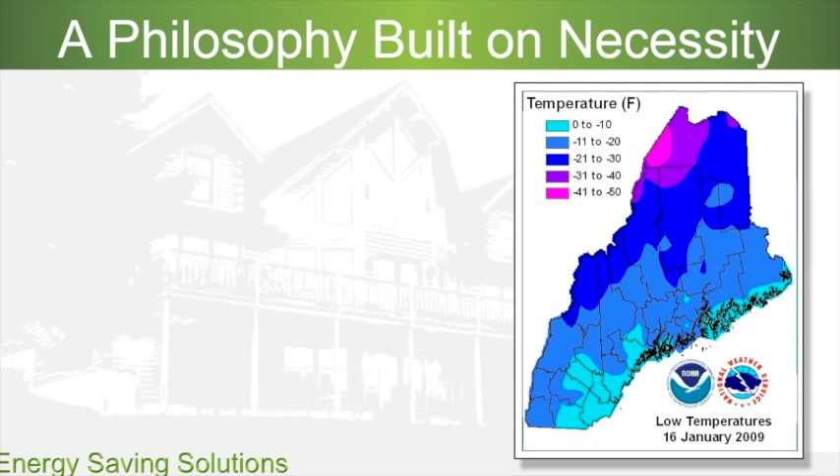And energy is something I've had an awful lot of passion for in the last few years, and I think it's a philosophy built on necessity, because we come from a very, very cold part of Maine, the northern part of Maine, and I think most people don't realize how cold it actually is up there. And on the slide you see in front of you now, on January 16th, 2009, one of the secretaries in the office actually took a picture of her thermometer on that day, which was just exactly 50 below zero. So you can see something we always strive to do in northern Maine is to stay warm. So I think part of the reason that I enjoy the energy part so much is that everybody wants to stay warm, and that's not really an exaggeration.

But for you folks, why is energy efficiency important? Obviously not for some of the same reasons as me, but controlling your cost. That's always the big deal when it comes to anything with your home, is what does it cost? And it's so easy to make your home very energy efficient today versus probably in past times. There is absolutely no reason not to do it, and that'll keep your costs down for the future. Now, something else that will definitely be important to some of you, as it is with me, is comfort. No one wants to sit near their windows or their doors or a light switch or a receptacle and feel a draft all the time. So comfort is also very, very important.

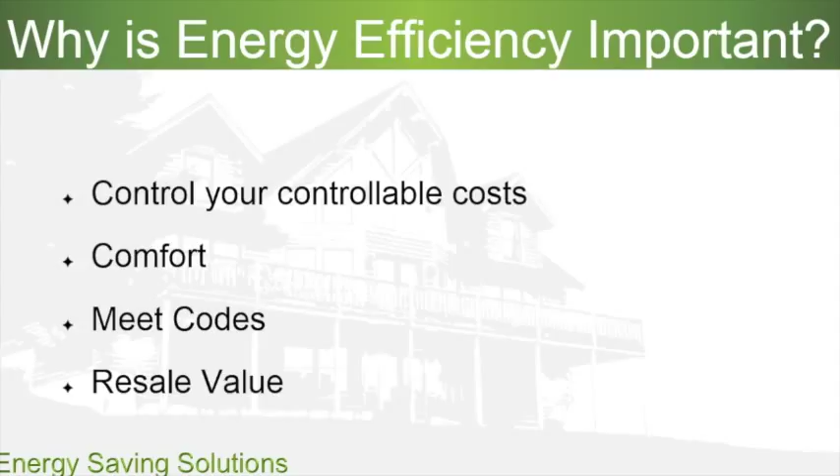A couple of things that you may not really think about that much. It's also important to meet codes, and we'll talk about that in depth as we go on. Meeting the codes will be different for different areas, but it's very important that you do, otherwise you will not be able to get that occupancy permit. Something else that maybe has not crossed your mind is the resale value of your home. Banks are getting smarter and smarter now, and they used to ask for just a copy of your taxes and your insurance costs. But today they're also asking to see the cost of your energy bills when you go to resell your home or even for a second mortgage. So resale value is also very, very important.

Now, what are some of the things that we can do to make sure that our home is energy efficient? And the very first one really doesn't have anything to do with your home at all, but it's got everything to do with where you're going to build. Now, if you've already picked out your land, then this will not apply to you. But for those of you that have not, I would strongly recommend that you take a map of the area where you're going to be working, going to school, shopping, all of your daily activities, and plot them on a map. And along with that, draw in the area where you'd like to purchase the land. And obviously, this will probably be a fairly large area. And you can start with the nearest area that you do all of your daily activities and work outward. That way, that will help control your commuting and your transportation costs and not break your family energy budget.

Now, the solutions to making your home very energy efficient are many and varied, and most of them are very, very simple. These first few slides I call the Working with Mother Nature series, because what they have to do with is taking advantage of what Mother Nature offers us. And she offers us so many ways to help us save energy. If we just pay attention to her, she can do a great job, really and truly. That may sound a little far-fetched, but it's really very simple. And the first thing we can do is take one long side of our home, as you can see in the slide here, and point it true south.

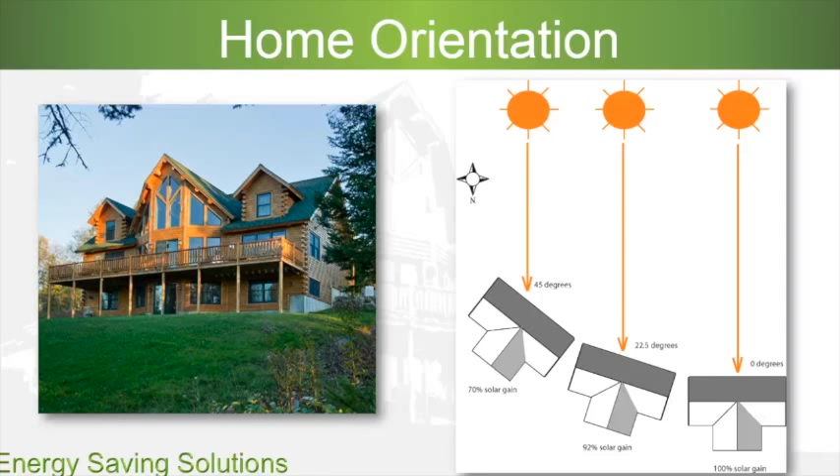And also, if you ever think that you're going to put solar collectors on your roof, and I hope many of you are considering that, because as technology grows and changes with solar energy, it's becoming so inexpensive to do it, it's almost a no-brainer not to. But if you are going to consider putting solar panels on your roof, any type of solar panels, whether they be electrical producing photovoltaics or hot water like on my own home, then you want them pointed true south to get the maximum benefit.

And if you are going to consider putting them on, I hope you tell us, because we've got something called a solar ready design that if you tell us which one of your roofs points south, we can design a chase or a pathway, if you will, that takes those pipes or wires directly from the roof, through the roof, and into your utility room or your basement or wherever it's appropriate in your house for them to go.

In my own home, of course, I put my solar collectors on back in the 80s, and I've got these ugly pipes that run horizontally across the roof and then down the walls and into the basement. They're ugly, they're inefficient, and they require more maintenance. So we don't want to do that. So we're happy to design that for you, and that solar ready option is absolutely no charge.

Something else that we need to consider on our home, again, very simple, very easy, and still working with Mother Nature, is the roof overhang. Because what she does to help us is in the summertime, the sun is very high in the sky. And in the wintertime, it is much lower in the sky. So with just a normal 2-foot overhang, which is the standard overhang on our homes, it will block out almost all of the summer sun.

We're letting in almost all of the winter sun, which is exactly what we need to do. We don't want that overheating, obviously, in the summer. And you can see by the slide on the right-hand side what the difference is in the height of the sun from July to December. And it is very dramatic and easy to take advantage of.

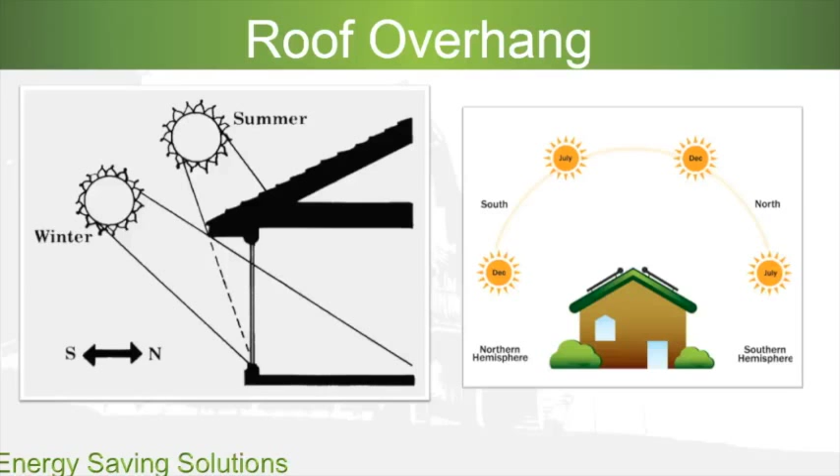Something else that is easy to do and hope you consider is natural lighting. If you think about what rooms you're going to be in your home when you're awake in the daylight hours, generally those rooms are your kitchen and your living room. So if that's where the natural light is during the day, why not put those on the south side of your home? Again, with a little bit of design, it's pretty easy to do. It doesn't cost any more to put them there than on the north or the west side or anyplace else. And you will get all that daytime light.

Now, almost all of us have walked into someone's home, and even in the kitchen or the living room during the day, the first thing they had to do when they walked in was turn the light on because it's so dark. There's just really no need of doing that, and it's going to expend a lot of electrical energy to turn those lights on all day long. So let's put them on the south side. And also, you'll find it's a natural pick-me-up to have all that natural light in your home all the time when you're there, because it's psychological.

It feels much better when you walk into a nice bright room versus a dark room. And for myself and my wife, we like to have that sun beaming in the morning, so we put our bedroom on the east side. So as soon as the sun pops up, it comes in our bedroom, and that's a nice way to wake up in the morning having the sun come in there. So a couple really easy things you can do with just natural lighting just by designing your home the proper way.

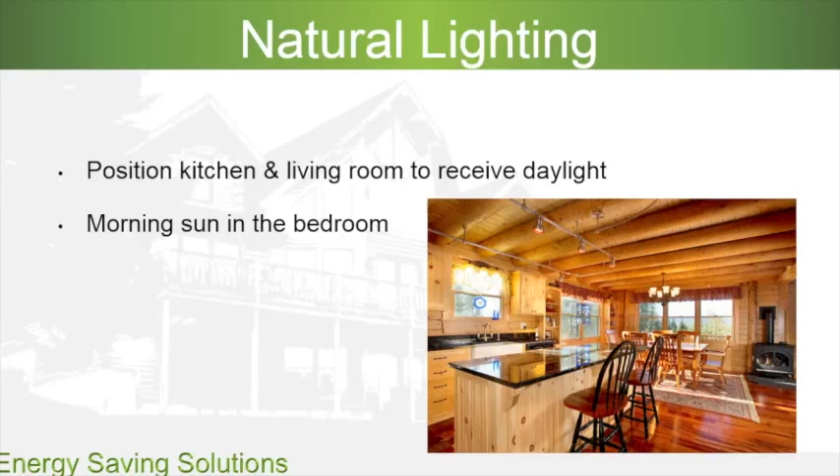Something else that's easy to do, but may take a little teeny bit of thought, are shade trees and windbreaks. Now we talked about the south side sun and how Mother Nature helps us with the angle by blocking it in the summertime and letting it in the wintertime. That's not the same way on the east side of our home and the west side of our home. Obviously the sun is rising in the east and setting in the west, and if we're not careful, we can get some nasty overheating in the summertime by not blocking those sun rays out.

So one of the easy solutions, again, that Mother Nature gives us, are some shade trees. In fact, I'd go a couple steps further and say I'd recommend deciduous trees, leaf-bearing trees, that are dwarf or semi-dwarf fruit trees. And the reason that I say that is, of course, with the deciduous trees, when it gets warm in the spring, the trees leave out. Cool in the fall, and you want to let that sun back in, the leaves fall off.

And the reason I like to have deciduous, dwarf or semi-dwarf fruit trees is because with the fruit trees, you can always shear them. You're always pruning your fruit trees to the proper size anyway. So if you want to let a little bit more sun in, prune a little bit more off. If you want to let a little bit less sun in, then let them grow for a couple of years. But you don't want to put elm trees or birches or maples, any big trees out there in the east and west side, because otherwise, eventually the trunk of the tree or the stem of the tree will block out most of your sun.

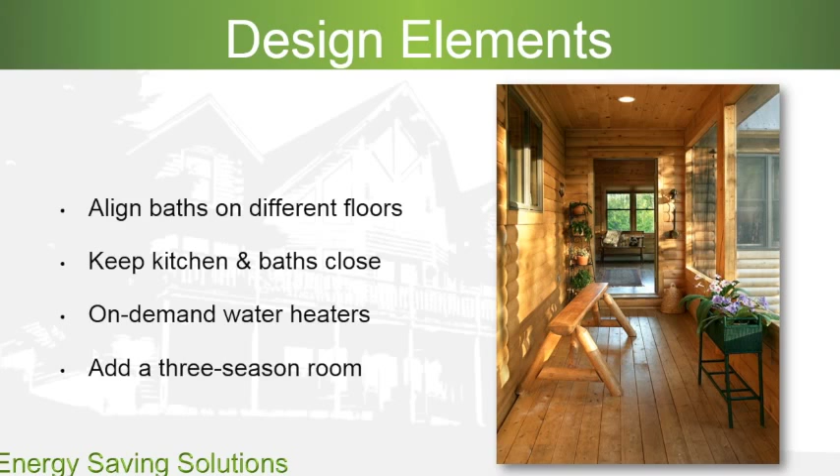So the wind would beat against that wall, but it wasn't an exterior wall to the main home. So it cut our heating bill by probably about 7% with wood consumption. So a couple of design ideas there that maybe hadn't crossed your mind, but really do make a significant difference.

But it only had 2 wires on it to hook it up. I just pulled out the old thermostat and plugged it in, and said, okay, I can do that. Well, immediately I found, and you can read up on these smart thermostats, especially this Nest one, that they are very simple to run. You don't have to really do anything if you don't want to.

But when you start turning it up during the day and turning it down during the night, and especially on the weekends if you're gone, it starts to remember when to turn itself up and when to turn itself down. So if you forget about it or if you're away, you can either turn it down with your computer or it remembers to turn itself down at night. So it works really, really well. Very simple, not real expensive, works real well.

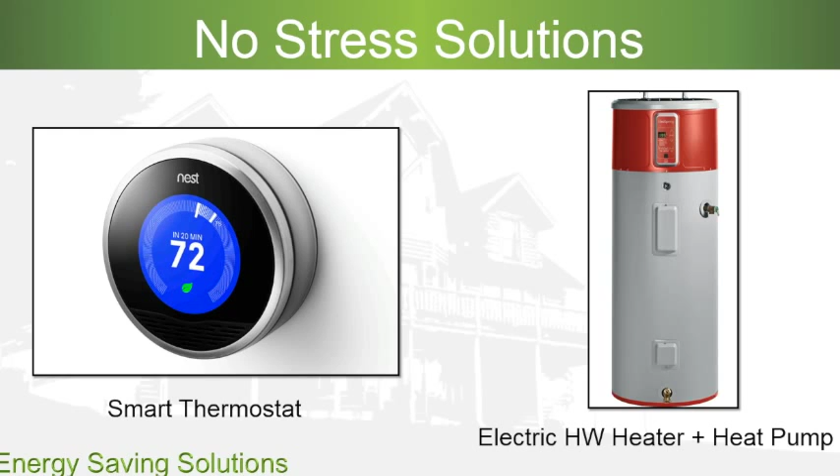Something else that we have to talk about when it comes to energy efficiency is windows and doors. Some of us think that glass is a good insulator. Glass is a very poor insulator. In fact, it's a great conductor.

So when we're designing our home, placing windows in it, we need to be conscious and be aware of where we're going to place our glass. Now, we've talked about that quite a bit in the past already, but on the north side, depending on your latitude, and if you're more into heating than you are cooling, you probably want to minimize the amount of glass on the north side and maximize it on the south side, like we've talked about. So obviously to gain the solar gain but not lose it at night.

And how do you know if you're getting energy efficient windows and doors or not? The very easy thing to do now is look for the Energy Star seal. Up until two or three years ago, it wasn't very restrictive to get a seal, so most companies got it. But the last 2 or 3 years, they've really tightened their requirements to get an Energy Star seal on windows and doors. And now they're probably in the top third of the country. The top third best windows and doors have the Energy Star seal, and it really does mean something, and it makes a difference.

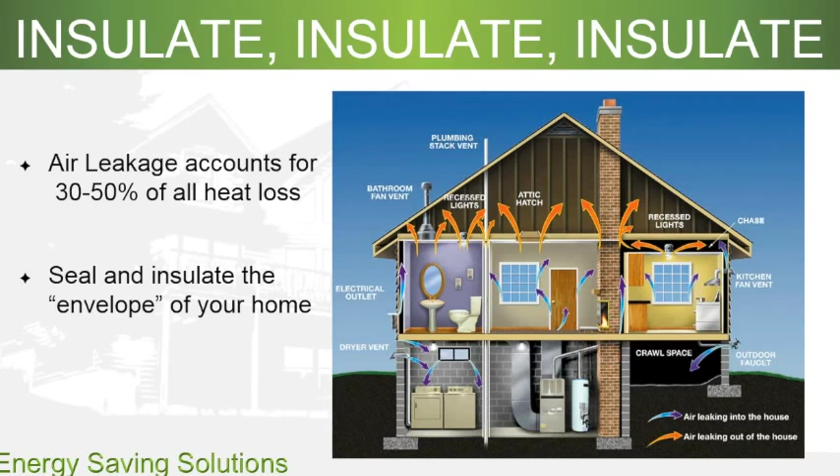Now, the number one way to prevent air leakage in your log home is buy dry logs. It's difficult to overemphasize that, because if the logs are dry and they move very little, then there's very little opportunity for air to get in there. But if the logs are not dry, then between every log, as it moves, there's potential for those logs to have air infiltration between them.

And I've heard so much when I walk around the home shows out there and listen to other companies selling different species of logs and how they dry them and that type of thing. I've heard so many stories about, well, it's okay to have green logs, or they're only kiln dried down to 19%, or whatever the case may be. I said, man, some of that is just so far off that sometimes it's good to have a third-party verification.

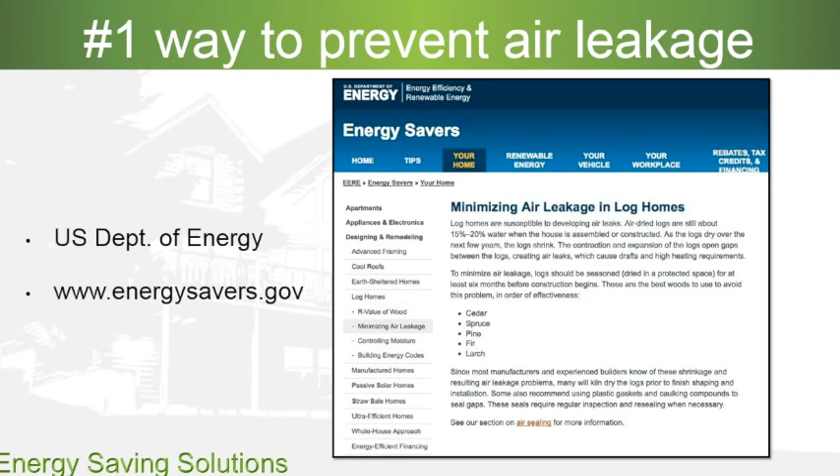We talked about the moisture content should be about 12% or less. Our 3-year running average at the mill is 11.92 moisture percent, and that is an average. Some logs will be more, some logs will be less, but the average is right around 11.9%.

And that's what we call equilibrium level. That means that the logs are pretty well done shrinking, but if it gets a lot of moisture out there, they're not going to swell too much either. It's equilibrium where there's not a lot of shrinking or swelling going on, and that is about the ideal moisture content for this area of the United States.

Now, if you were in the Southwest, the ideal moisture content would be around 10%, so we'd dry those more if they were going to Arizona or someplace like that. But the Northeast and the East especially, 12% works very, very well.

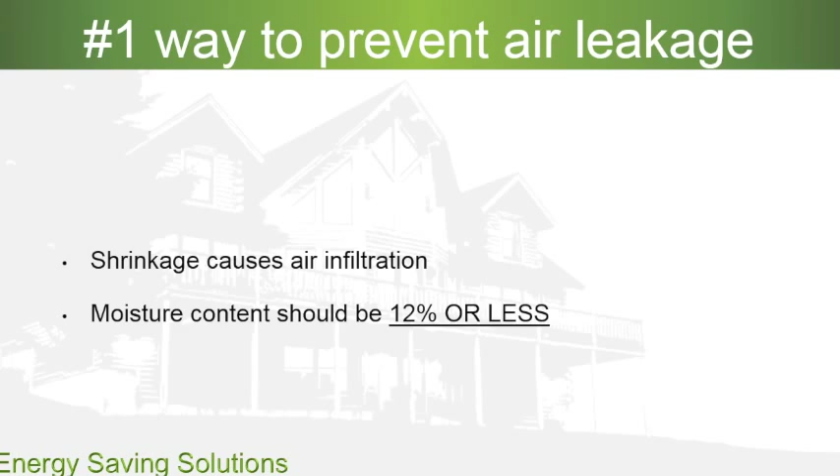Now, we've talked a little bit about insulation, but how much is the proper amount to use is always a question. The IECC codes, the International Energy Conservation Code, from the federal government, indicate that these are the minimum requirements for the wall in your area.

Now, you can see that we're in that purple zone in northern Maine, so we're zone 7. Most of you are probably going to be in 4, 5, or 6, and in the Mansfield area, probably zone 5 or zone 6. So that means you want a minimum R factor of 17 or 19 in your wall.

And I emphasize this is the minimum factor because these are the 2009 energy codes. And as the years go on, just like miles per gallon in your car, there will be higher requirements. So I hope you consider going a little bit more than the 17 or the 19. 21 or 23 would work very well, and I think that'll be where it'll be in the future. So I hope you consider that.

It's so inexpensive to add a little more insulation now than it is to try to add it later. It really costs just a few hundred or very few thousand dollars to add that little bit of insulation, and I hope you do. And this is the minimum requirement, as I said, that the federal government has.

Now, just to let you know, your area may or may not require this amount, and the only way to know for sure what's required at the state level in your area is to talk to your local code enforcement officer. But again, remember about resale and everything else, and it's so cheap to add insulation now versus later.

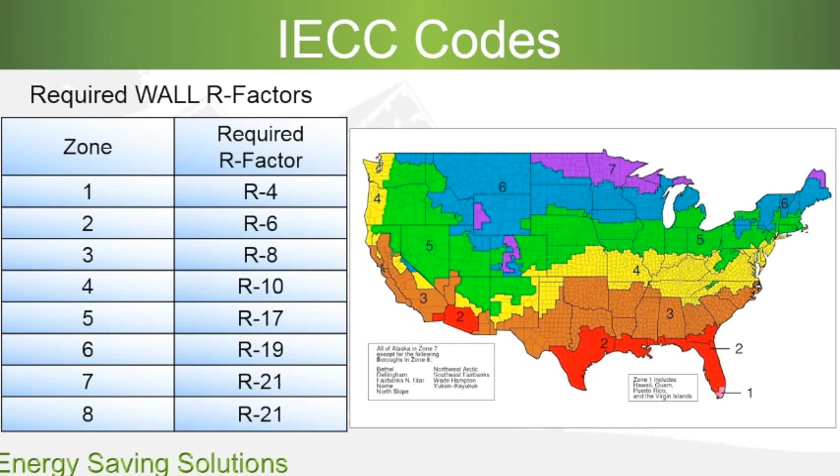And it's so easy to do. With the energy envelope system that we have, you start out with that full log on the exterior, and you just add enough on the inside to meet your energy codes and whatever your personal requirements may be. We're currently building one in southern Maine right now.

It has 6 inches of insulation in the wall and 8 or 9 inches in the roof, and it would be close to a zero energy or a passive home, which means he'll require little, if any, outside energy to heat and cool his home because of the massive amount of insulation and the collectors he has on the roof. It'd be pretty much energy free from outside his home, and that's easier and easier to do. So if you want to keep your energy bills down, when you're building it, that's the time to do it.

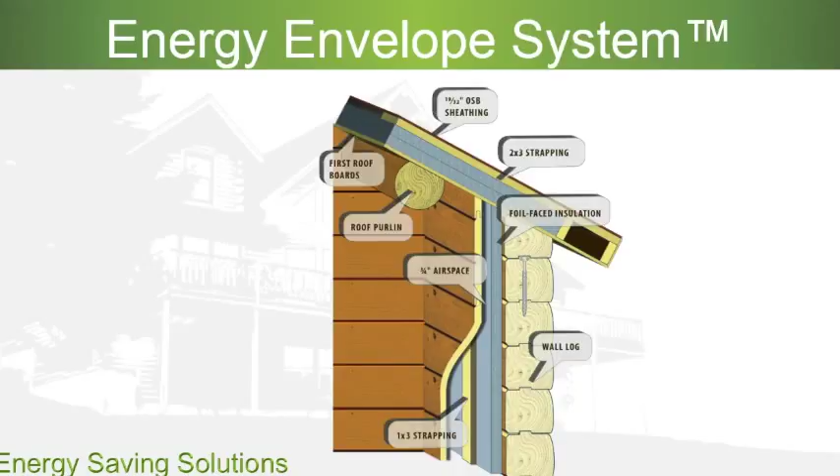And yes, it's good to listen to other people who recommend and say, you know, this guy's good or that guy's good, but when it gets down to it, you're the one that needs to make that decision.

And to me, the best and the proper way to make that decision is do it on your own. You do your own research. It's simple, it's easy to do. After you've narrowed it to a couple, then you ask them for references. And you ask them for homes and names and addresses of people they have built for recently. And the reason you do it recently is so you can see what technology they're using.

And if they've had any financial difficulties, it would probably arise on the most recent home versus one obviously 2 or 3 years ago where they wouldn't be there now. So ask for recent homes and then get permission from the general contractor and the homeowner and ask him to do that for you, or at least I think you should have him set it up because he knows the people you probably don't, to go visit them.

Because beauty and quality, to me, are both in the eyes of the beholder. I may see something and I think it's great quality. You may see something and think it's not. But the bottom line is the general contractor has to please you and nobody else. So you go visit one or two of his homes, you talk to the homeowner, and see how the general contractor was to work with.

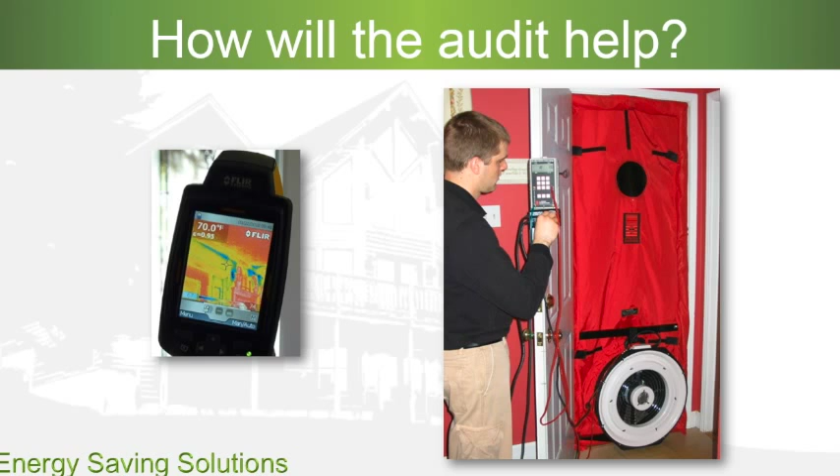As the vacuum is being created inside the home, air will rush in wherever it's not super tight. Now, all homes have air infiltration. We're not building submarines. No home will be perfectly airtight, and they don't need to be, and we don't want them to be. But they should be sufficiently tight to meet your energy objectives. After he turns his fan on, your energy auditor will pick up the infrared camera and walk around shooting every part of every room, and he can see where the air is coming in and if the home was properly insulated.

In this slide, you can see the yellow on the left side in a living room, and the red on the right side in a bedroom. These homes are completely finished. They're both done with sheetrock, and the homeowner would never know why his heating bill in the winter and his cooling bill in the summer are way too high, unless he had an energy auditor. He'd just know that they're too high.

But you can see, obviously, in both cases, that the fiberglass was left out of the top of the partitions, and they sheetrocked right over it. So there's obviously tremendous heat loss, or heat gain, as the case may be, summer or winter, and it's costing them way too much. And you would never know if you did not have an energy auditor. That's one of the many reasons I strongly suggest it. Now, if you've got a good general contractor, this won't happen, but you'll certainly get peace of mind.

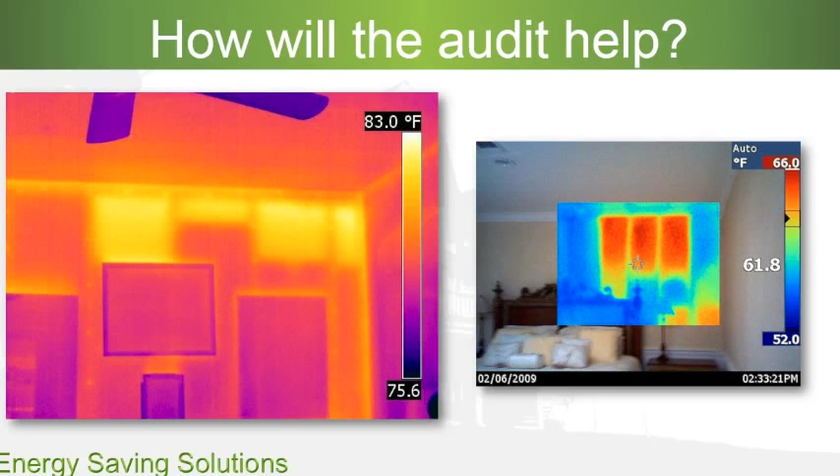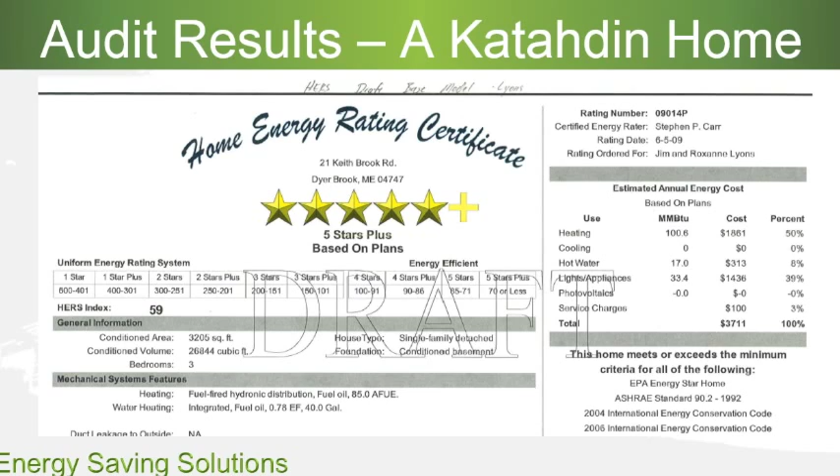In some areas, like the state of Maine, depending on your HERS rating, you'll get $2,000 or $3,000 back on your next income tax return. In some of the southern states, you get 10% off your electric rate for the next 3 or 5 years. There's all kinds of incentives, but basically, in the state of Maine, if someone charges you $800, which is a common fee for your energy auditor, you get $2,000 back the next year. There's no reason not to have an energy auditor, folks.

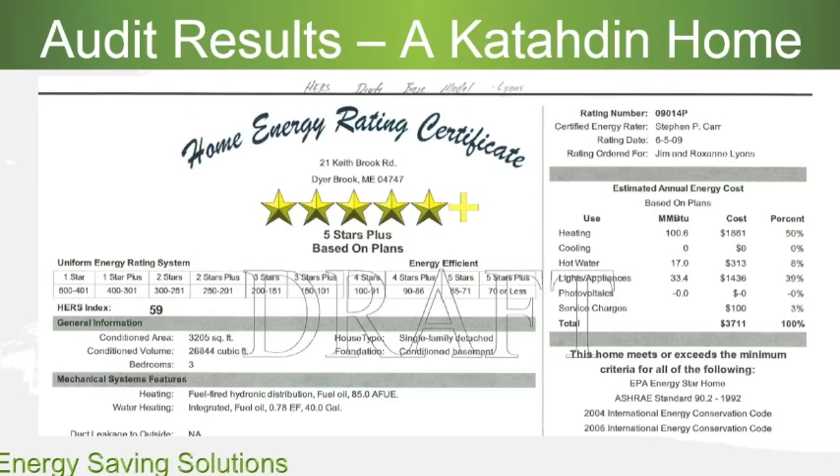It just plain isn't. You'll have peace of mind, and a good chance your home will be a little tighter and warmer just because everybody knows that they're going to be checked. And the results are going to be very obvious when the home is all built. So I hope you get someone like that.

In conclusion, energy efficient log homes are very easy to build. It's so cheap to do it early and so expensive to do it after the fact that there's no good reason not to do it when you're building your home. If you choose a good general contractor and auditor, you should get a wonderfully tight, energy efficient log home as long as they pay attention to details.